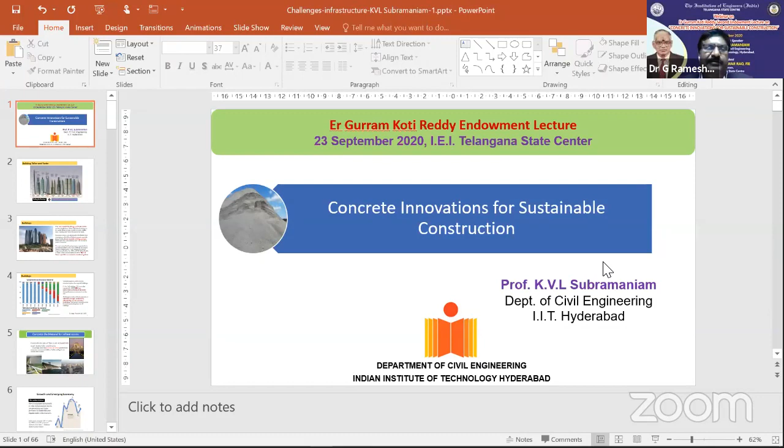Let me start by sharing my screen. Right, so let's see. Okay, so now I'm in the presentation mode, and again, thanks once again for giving me a chance to present. It's a topic that I'm very passionate about: concrete structures and the innovations taking place in concrete materials and concrete technology.

Because sustainability has become a buzzword, where we are all talking about sustainability and sustainable construction, I think it's important that we put things in perspective when looking for sustainable construction. So with this brief introduction, let me get started with where we were, where we are, and where we are going.

Burj Khalifa, to give you a point of reference, is about 850 meters tall, almost a kilometer in height. We are literally pushing the envelope here in terms of what we are able to achieve in construction. It's not just that we're going high, but we're pushing the envelope in terms of several technologies that need to concurrently be possible for us to put a man basically living happily at 850 meters, which includes, of course, the construction technology.

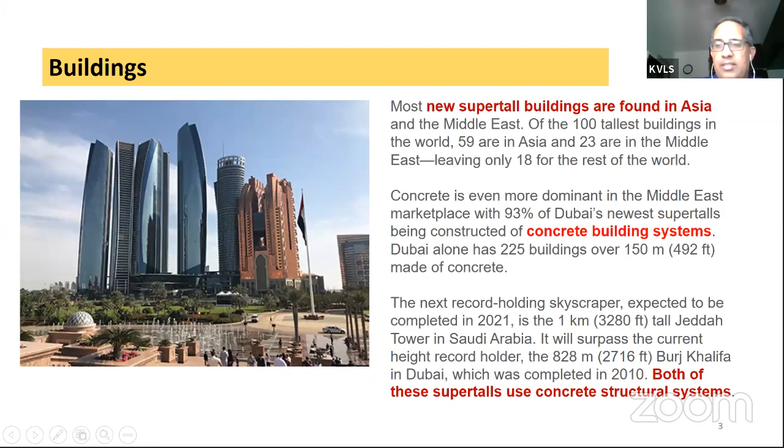If you look at numbers coming out of Dubai, which has perhaps the largest concentration of super talls, 93% of super talls in Dubai have essentially concrete building systems. Two of the tallest buildings in the world - Burj Khalifa, which is 850 meters tall, and the Jeddah Tower, which is under construction and will be 1 kilometer in height when complete - both of these super tall structures use concrete structural systems.

Let me show you a distribution of how concrete has emerged as the material of choice for construction. In this bar graph, if you look at the extreme left, the 1930s was when super tall construction started - the Empire State Building was built in the 1930s. In that decade, the color is light blue, which means steel was the material of choice for super tall constructions or tall buildings. As we walk across the decades from the 1930s to the 1940s and so on, by the time we come to our current age, 2010-2018, concrete is starting to replace steel as the material of choice, and steel has basically shrunk in proportion of usage in super tall buildings.

Concrete is now basically used in 63% of super tall buildings - buildings taller than 200 meters are basically built with concrete structural systems. Then there are other alternate forms of construction like composite construction, where we use steel and concrete together for a very efficient structural form and structural systems. Between composite and pure concrete systems, they basically make up the bulk of constructed super tall buildings.

Now, the reason this has become possible is because of the advancements we've managed to achieve - advancements in concrete strength, where we are now able to produce very strong concretes. We've made tremendous advancements in pumpability of concrete - now we're able to pump concrete to great heights, to 800, 850 meters. Of course there's also affordability in terms of cost and overall economy, as concrete is the cheapest construction material. And there are several construction techniques, which I'll emphasize later in my talk, that are now available, which are not only speeding up construction but actually giving way to what we call form-free construction, where one can literally go from the drawing board to having a constructed structure.

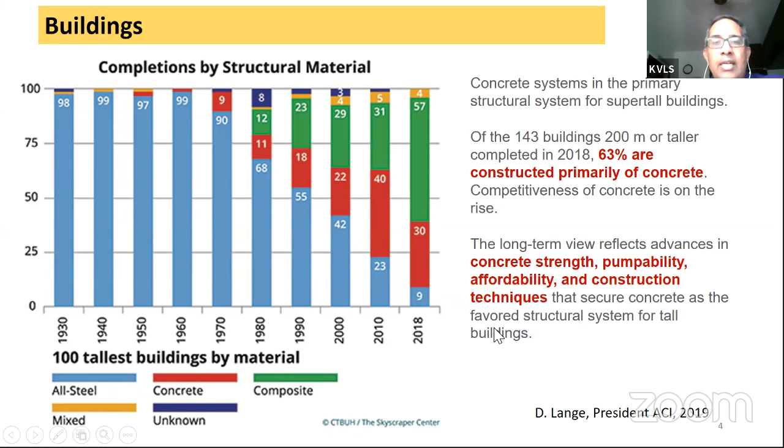Going forward, just to give you a brief overview of what concrete is and where it is used. Today, concrete is the most extensively used construction material in the world. It is the second most widely used material on this planet, second only to water in terms of consumption. If you look at total material usage, we consume about 2 tons of concrete for every human being on this planet per year. Its usage on this planet is second only to water.

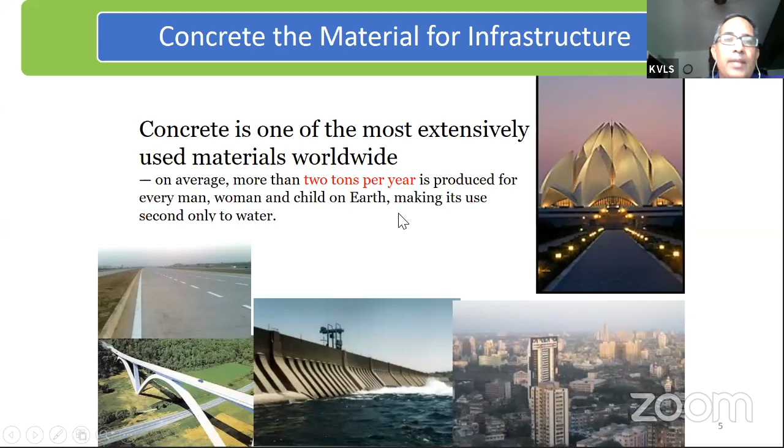Now, if you look at India in particular, we're talking about a $5 trillion economy. That is our dream. This is an old report from McKinsey, from around 2007-2008. Around that time, they projected that if India is an aspiring financial superpower, it would have to invest in infrastructure, close to $1.2 trillion. Without infrastructure, there is no economic growth. We cannot dream of 7 to 8% sustained economic growth without providing the infrastructure needed to sustain that growth. Recently, Niti Aayog has looked at this more seriously, giving infrastructure a big push, realizing we cannot achieve the projected growth and become a $5 trillion economy unless we invest money in infrastructure.

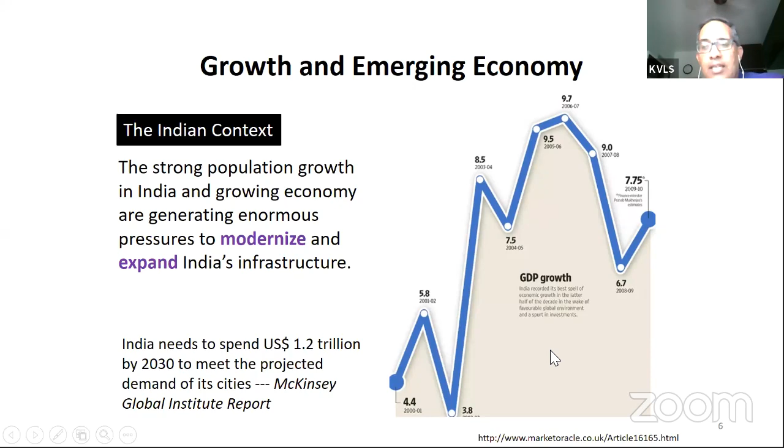And when it comes to infrastructure, concrete is the material of choice, which means we have to look at concrete very closely. We have to be able to produce this concrete in the volume needed to put all that infrastructure in place, so we can sustain the economic growth we're talking about, so we can catapult ourselves from a $1 or $2 trillion economy to a $5 trillion economy. So that's the backdrop of the material concrete and the role it is going to play in our economy.

Now, one of the issues with the requirement of concrete for infrastructure is that concrete is made with cement. This graph shows cement production. If you look at the red here, that's China. If you look at China today, in 2020, China is the largest producer of cement in the world, followed by India, shown in blue. So we are the second largest producer of cement in the world. In fact, India produces more cement than the US and Europe combined. So we are even today one of the largest consumers of cement, second only to China.

Now, where did all this cement in China go? Starting from 1990 up to 2020, for almost 3 decades, China was the leading producer of cement, and none of it was being exported. It was being consumed internally, domestically. All of this cement went into making concrete, which went into making their infrastructure. Today, if China is a $12 trillion economy, it is because of the infrastructure they have put in place over the last 3 decades.

Now, if you look at this graph, India's projected demand up to 2050 is going to take us into territory where by 2050, we will be the largest producer of cement. We need this kind of cement production for the infrastructure we're talking about - the high-speed train project, port facilities, dams, the road network, transportation network, and even housing for the large population migrating into urban centers. So we need a lot of concrete, and for that, we need a lot of cement.

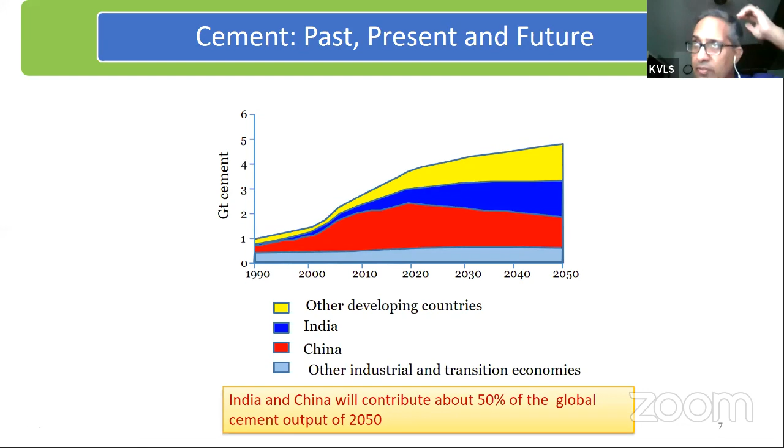One of the biggest problems with this requirement of cement is actually threefold. It's not just one problem. And we need to overcome these problems in order to sustain the production of cement so that we can hit our economic target of tripling our economy in the next 20 years.

Now, what are the challenges with cement production?

One of the biggest challenges with cement production is our projected need of cement in 2050, which is going to be 750 million tons per annum. That is the volume of cement we'll have to produce. It's a projected number, but it's based on a realistic estimate of what we need to put in place in the form of infrastructure.

So to meet the 750 million tons per annum demand, we need to produce the raw materials needed, and one of the primary ingredients for cement production is limestone. Our current available estimates of limestone are only going to last us 35 to 40 years, which means we may run out of limestone before we're ever able to produce all the cement we need for putting our infrastructure in place.

The second problem is the energy requirement. Cement is an energy intensive material. We need a lot of energy to produce cement, so we need to constantly look for sources of energy to sustain cement production.

And the final thing is the carbon footprint that goes with cement production. Cement has a very large carbon footprint. One ton of cement produces almost 850 kilograms of carbon dioxide. Depending on the source, cement production is the second or third largest anthropogenic source of carbon dioxide in the atmosphere.

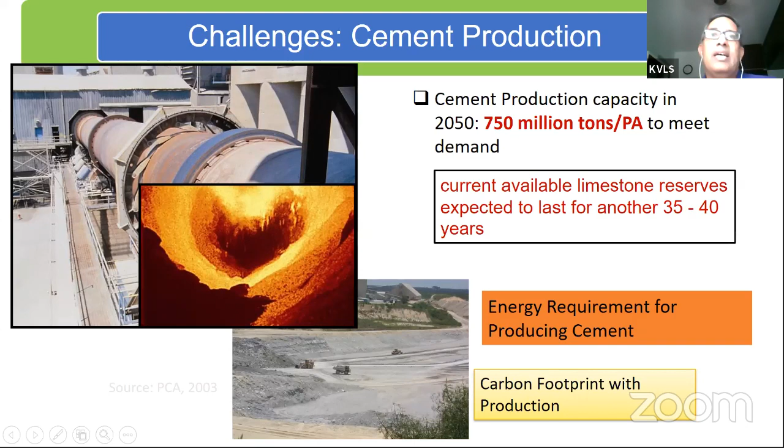So with all the environmental constraints, cement production does become a challenge in the future. How do we keep producing cement while pumping out so much carbon dioxide into the atmosphere? And how do we produce cement with these limitations of limited limestone resources and energy demand? This is a problem that we as people researching concrete are very well aware of, and we've started working on it in several forms.

Normal cement is made with clinker and ground with gypsum. That is typically what cement is made up of: 95% clinker and 5% gypsum.

Now we are already starting to look at replacement strategies for cement. The idea is to produce cement which uses less clinker. It's the production of clinker that uses limestone, that's associated with the carbon footprint, and that's associated with the energy requirement. So one of the things to do would be to look at replacement of clinker in the cement.

We are now looking at replacing clinker with waste materials like fly ash and slag, both of which are post-industrial waste materials. We're able to produce cement while reducing the clinker factor. Through research, we've managed to reduce clinker factors in cement sometimes down to almost 30% to 40% of the original clinker requirement of normal, ordinary Portland cement.

So that is already happening. Now what that allows us to do is stretch our resources significantly, reducing the environmental impact and the energy requirement in cement. So that is one way we're trying to become more sustainable, stretching the material to give us the required performance.

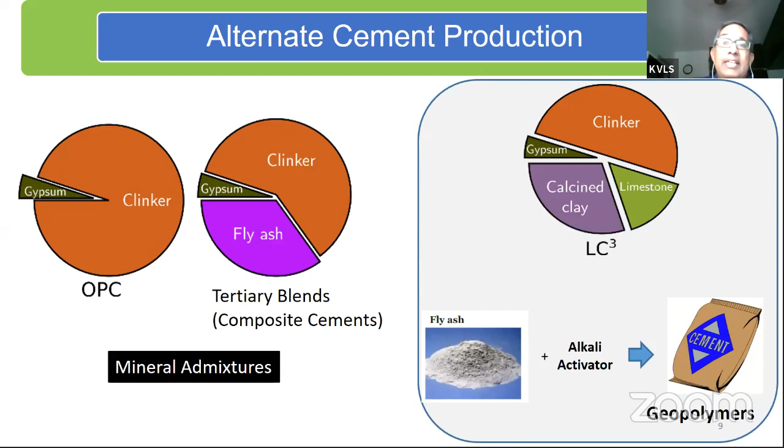These are materials that are produced as a byproduct of some other process. We are able to use those materials and start producing cements. These cements rely on a process called geopolymerization, hence the term geopolymers, and these cements are also coming online. Now, the biggest advantage of using these cements is that we utilize waste produced by another industry. So basically, there is no carbon footprint associated with this material, and we are producing material that is required. So it kills two birds in one shot. That work is also going on in parallel, where these alternate cements are being explored and developed for commercial use. Now, that is as far as the material challenges go.

Now, what about concrete? One of the biggest challenges we have in concrete is when we place concrete, we need to put it into formwork. So we have to arrange shuttering and pour concrete into it. If I want a beam, I put the shuttering in the form of a beam and pour concrete in there. Eventually when concrete hardens, it takes the shape of the beam. Now, one of the biggest disadvantages with this is that I'm limited to rectilinear shapes.

I'm basically limited to shapes which are rectangular in cross section, because on site it's very difficult for me to form complicated shapes. So that is one of the biggest disadvantages of concrete. The disadvantage lies in the fact that rectangular shapes are not most efficient. They have a high material usage. If I want an efficient structural shape, I'm better off using an I or a T shape. But forming I or T shapes in the field is very difficult, and that's why we end up using these rectilinear shapes, leading to inefficient use of material, resulting in heavier structures and overall inefficiency in terms of material usage. So that is one of the biggest challenges in construction: how do we make this process more efficient, coming down to using the material more efficiently?

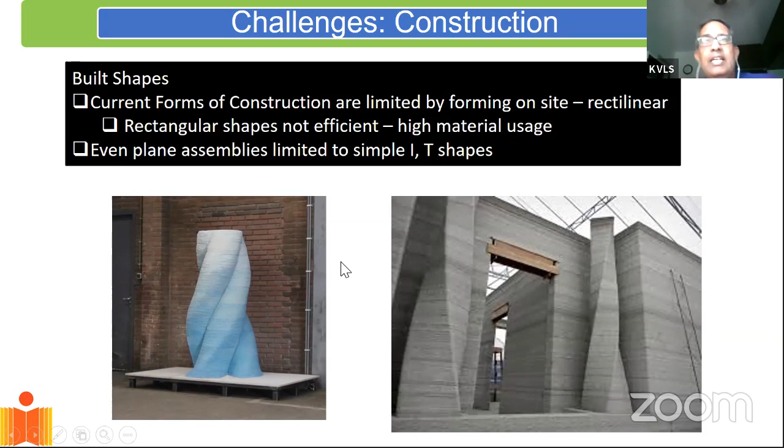And the question is, what if the most efficient shape is what is shown here on the left hand side? What if the most efficient shape of the column happens to look like a twisted shape as I've shown here? Now, doing this on site is practically impossible with our current construction technology, which means that we actually have to develop construction technology, construction methodologies which will allow us to produce these shapes on site, taking us into a completely new domain. These are the new developments that we are working on in terms of concrete construction technology.

Some of the other challenges with concrete is that we basically use formwork for construction. We have to assemble the formwork, put our steel and tie the steel work, and that is a very time consuming process requiring a lot of labor. So one of the other challenges we are facing in concrete construction is, can we speed up this process? Do we really need formwork? Do we really need shuttering? Do I need this reinforcement in the form of mesh, which has to be brought in place and tied in place? Can I speed up this whole process?

And so that is where we are looking now at form-free construction, where I don't need formwork. I can simply come and take an AutoCAD drawing and print a structure that I want to use. So that is the ultimate form of technology that we are all pursuing.

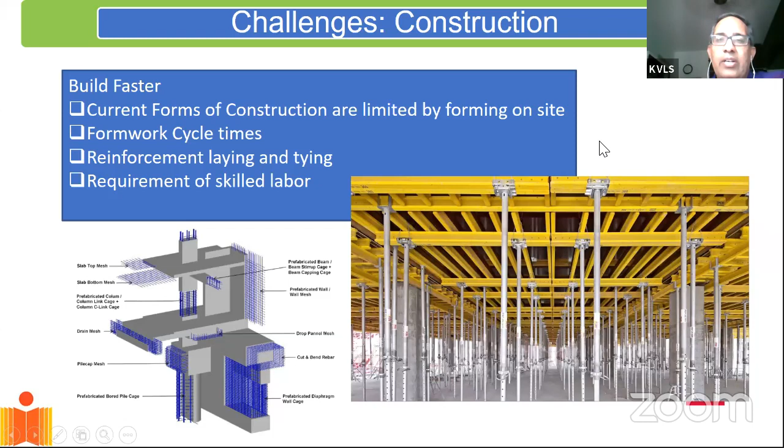So now, if I look at concrete construction of the future, what we are looking at is making concrete responsive to the requirement. Previously, when I was a student, we were taught concrete as a 1-2-4 or 1-3-6 mixture. We would mix concrete in a certain proportion of ingredients, cement, water, and aggregate, and hope that we got the strength. That is it, it was just some material that gave strength. But now we are revising our outlook on concrete, saying it is no longer enough for concrete to just mix and deliver strength. We want concrete to be responsive to the requirement, where we want to tailor the delivery and placement of this material. I want to engineer the material so I can deliver it in the way, shape, and form that I want, and once it is in use, it should ensure the performance. It should basically give me a long-lasting structure up to infinity.

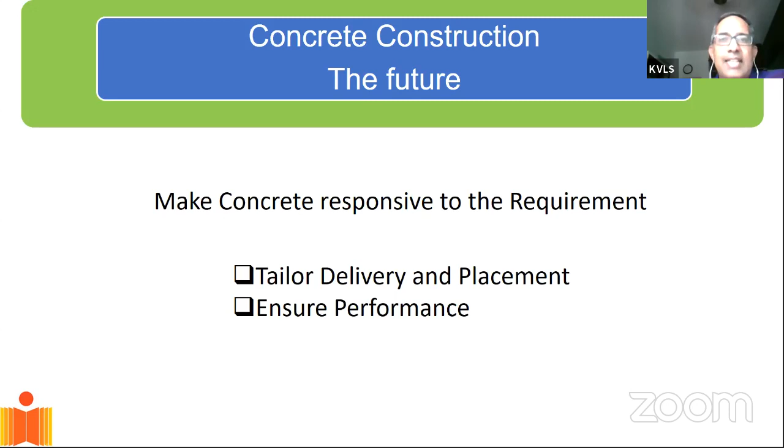Essentially, that is what we are looking at in terms of our concrete construction of the future.

Now we have moved into what is known as performance-based design in concrete. Conventionally, we used prescriptive requirements of strength, saying we need M35 grade, M40 grade, or M60 grade of concrete. These are all prescriptive measures of strength, and that's how we designed our structural members, designing for strength using concrete of a certain grade.

But that is now shifting. Strength is only one of the performance criteria. Design criteria are now expressed in terms of achieving performance objectives. It's not enough for concrete to just meet strength requirements, or for the structure to withstand extreme events. It should deliver on performance objectives.

Now we're talking about performance objectives not just in hardened concrete or when concrete is used in a structure, but performance during formation and placement. This has become very important. I want concrete to behave in a certain way while building the structure, and it should give a long service life. So performance during service life and during construction have both become important performance measures of concrete.

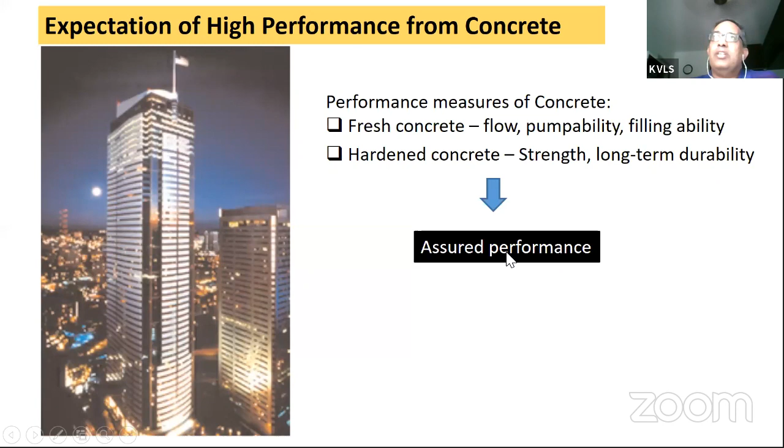Then in hardened concrete, once it has hardened, it should deliver on strength, which we already do today, but it should also ensure long-term durability and give long-term performance. If I'm able to hit all these performance measures, I get assured performance, not just in the short term but also in the long term.

So performance specification is now shifting to also consider the material perspective. Performance specifications were already used in structural performance, designing structures for seismic, wind, and other extreme events. But now we bring that into the materials perspective too, talking about formability of the material - how formable is it, can I form it into any shape I want?

Placement and speed - how fast can I place the concrete, and how fast can I deliver the structure? And of course, long-term durability - once the structure is in use, how durable is it in the long term?

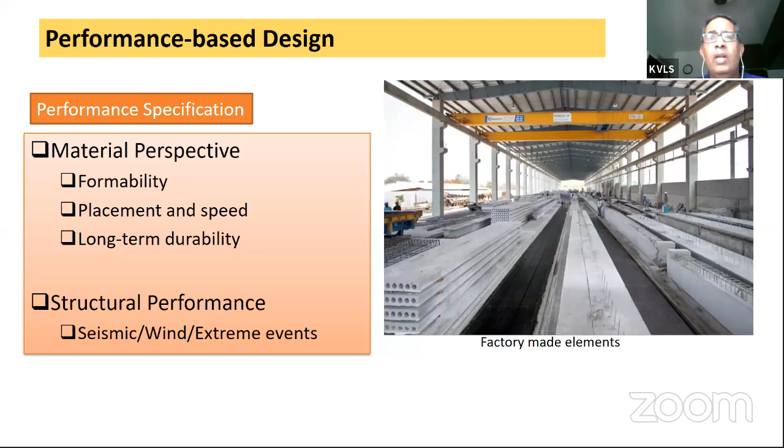So just to show you some performance requirements put in place in some marquee or noted buildings: in Burj Khalifa, the pumping of concrete was achieved for a height of about 601 meters - concrete was pumped for almost half a kilometer.

That is an achievement in materials, because concrete is made up of cement, water, and aggregate. If I try to pressurize the material to create a head of 601 meters, the material will start to segregate - water, aggregate, and cement will separate because under that high pressure these three materials have different specific gravities and tend to segregate. So how do I keep this mixture homogeneous so it flows without segregation when raising the head to about 600 meters?

That is the challenge, and it requires material design. How do I design the material so that I'm able to achieve this?

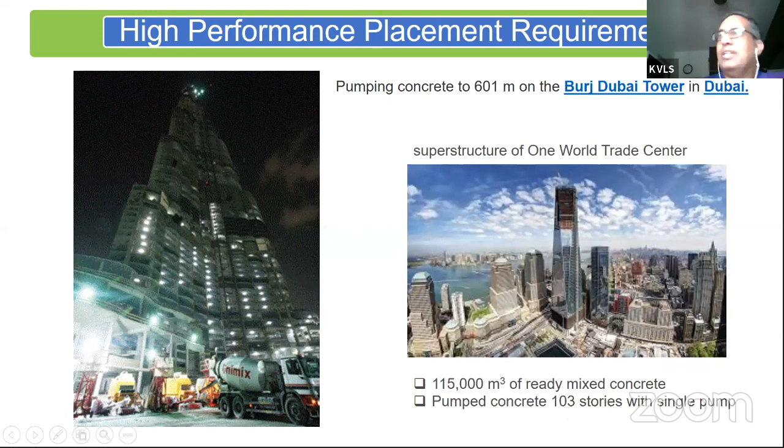Now, in the superstructure of One World Trade Center in New York, this is the structure that replaced the World Trade Center, concrete was pumped for 103 stories in a single pump - lifted about a height of 103 stories in one single pump. That requires performance requirements from fresh concrete.

Now, just to show you the specifications put out for One World Trade Center: concrete had to be made with less than 236 kgs of cement per cubic meter of concrete.

Now, this is a very low number. Most of us who do concrete mix designs know that at the very least we use 300 kgs of cement per cubic meter, otherwise 350. 236 kgs of cement per cubic meter is a very low number, but this was specified.

It was specified to the contractor that he or she could not use more than 236 kgs of cement per cubic meter. Not just that, concrete up to 40 floors had to achieve a compressive strength of 80 to 95 megapascal, and the upper floors had to achieve 60 to 70 megapascal. So the contractor had to deliver a concrete mix design achieving 80 to 95 megapascal using a very low weight of cement per cubic meter.

That, of course, requires very careful thought of mix design, where supplementary cementitious materials have to be used - slag and fly ash. Optimization has to be done. Careful mix design has to be done in terms of packing of aggregate and cement to achieve these specifications.

In addition, there were performance requirements put in place. The performance requirement was that there was some slump flow requirement, but also the ability to pump. It was required that concrete should be pumpable for 15 floors for the 95 megapascal mix, and the 80 megapascal mix should be pumpable for 40 floors.

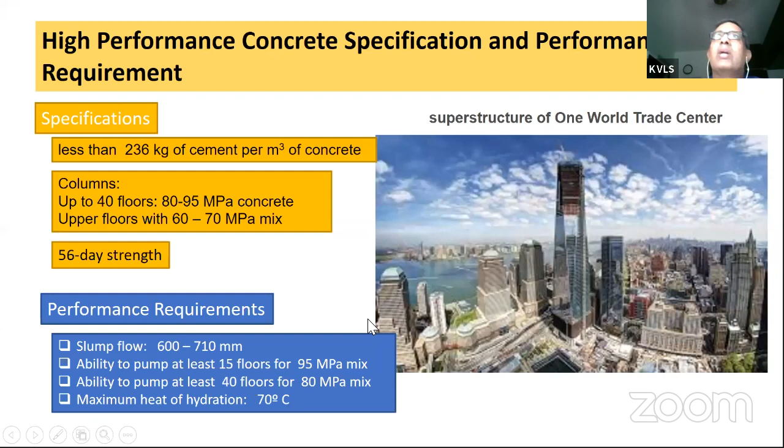The only way one can meet these performance requirements is basically by bringing in additional materials. If you look at concrete, the basic combinatorics of cement, water, and aggregate cannot achieve what I just talked about. I cannot deliver on the performance just by thinking of concrete as cement, water, and aggregate. The age-old philosophy of 1:3:6 or 1:2:4 concrete will not deliver what I talked about.

What we need is basically, this is what is now expected from concrete. I want concrete to flow like water. I want it to set on demand. I want it to gain strength rapidly - that is, rapid strength gaining so that I can turn around structures much faster. I can have 3-day slab cycles instead of 7 or 14-day slab cycles.

The concrete should be durable to infinity. That is, once I cast the structure and it's put to use, I forget about it - it basically retains its original level of performance over the long term. It looks like new without maintenance. That means the material should have some kind of self-cleaning, self-cleansing ability. It should not attract fungus. It should not attract dust. It should have some of these abilities to clean and rejuvenate itself.

And of course, all of this has to be achieved at a low cost, so I cannot start driving up the cost because then nobody is interested in the material. These are the requirements that are now becoming quite common expectations from concrete in terms of its usage in structural applications. How do we do this now?

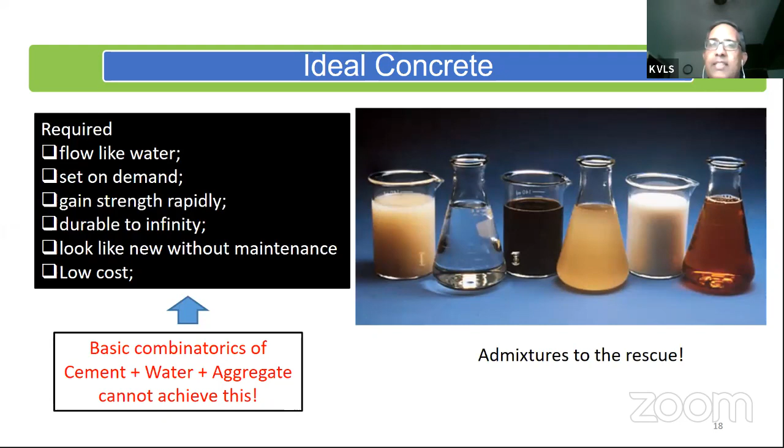Since the basic combinatorics does not work, we have to start using admixtures. These admixtures have started coming up into the market now. These are chemicals which are highly specialized - engineered chemicals designed to improve specific properties of concrete. Small quantities of these admixtures can produce significant improvement in the performance of concrete. So what is this admixture? Basically, an admixture can be either a chemical or a mineral admixture, depending on its origin.

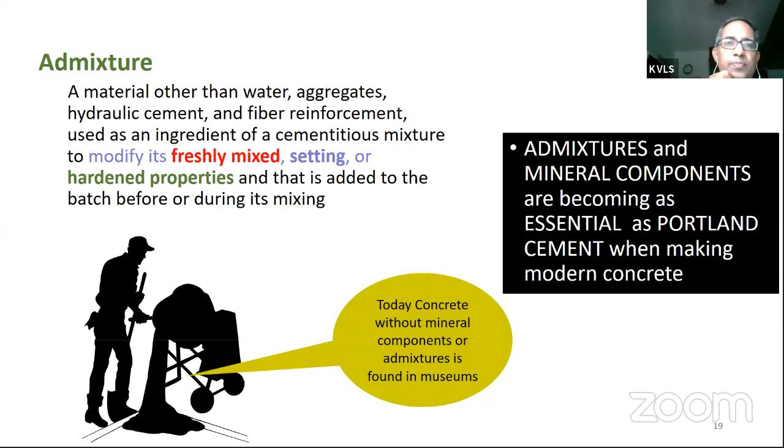It is added to concrete, and basically it modifies the fresh mixed property, setting behavior, or the hardened properties of concrete. Practically all concrete made today contains admixtures. When it comes to requirement of admixtures, because I'm targeting specific performances, we look at admixtures as enablers of performance. I'm trying to target specific improvements in performance with the use of these admixtures.

So when it comes to performance, I'm talking about performance in the fresh state - rheology control, the flow behavior of concrete. Can I engineer that to achieve what I want in terms of buildability, placement, and pumpability? Then I also want to enhance the performance of mature or hardened concrete in terms of strength and durability. In the first part, I want to look at this performance modification in terms of fresh concrete, and of course there's a whole list of admixtures available.

And the list is basically ever growing. Every other day we see a new admixture that has come into the market, and these are enhancers of fresh concrete performance - the concrete performance when it is still fluid, when we are placing it. That's what we are trying to enhance. We are basically looking at placement and production control - how do I gain control over the placement and production of concrete?

Gone are the days when we are looking at concrete as simply mixing and dumping it into the formwork. Now we are using words like placement and production - that's what has come into the jargon now.

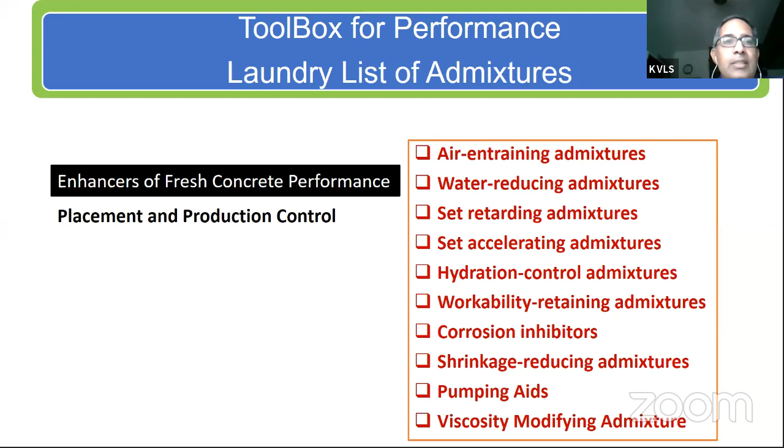So when it comes to transportation and placing of concrete, we're looking at construction performance during placement itself. And now we are expecting, like I had shown before, performance in pumping. I want concrete to be pumpable, and I can specify the height, but the material should give me a homogeneous mixture that can withstand that pressure without segregating.

I'm talking about concrete that can self-level itself - that is, it flows like water, fills the form, and I don't need to vibrate it. The final goal for all of us working in this area is formless placement. Can I actually do concrete where I simply mix it and print it into whatever shape I want without having to use a form, formwork, or shuttering?

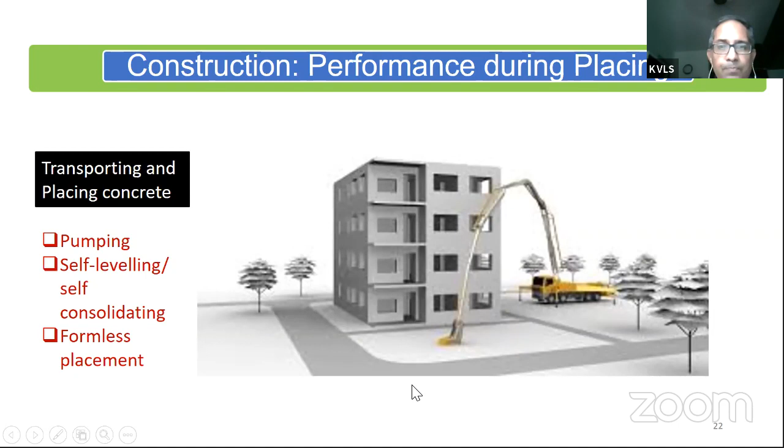So let me just quickly take a look at some of the admixtures that are used. The most common admixture that has now become quite common in usage is the water reducer. It basically reduces the demand for water. By adding a little bit of this water reducer, I'm able to increase the flow of concrete, basically getting concrete to flow instead of slump.

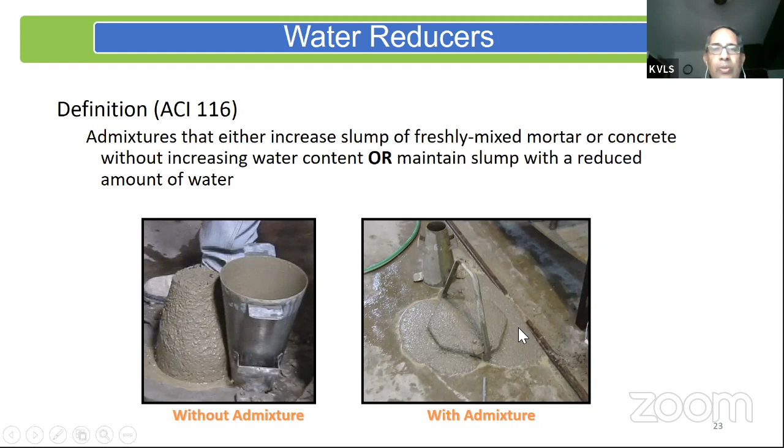So this is how concrete looks like when it slumps - it basically still retains the shape of the cone. But when it flows, it basically spreads, and that's what I'm trying to achieve.

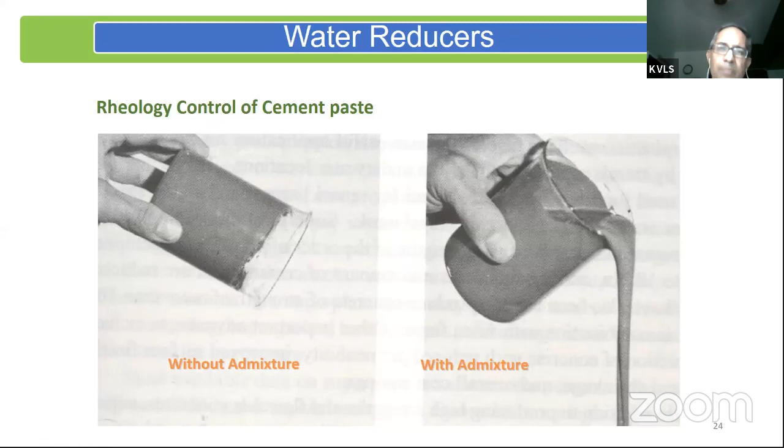If I look at cement paste without that admixture, it is a paste, but a very viscous paste, and I'll have difficulty trying to empty it out of this beaker here. But the minute I add a few drops of this water reducing admixture, I'm able to get it to flow like a very thinly viscous liquid - it starts emptying the container very easily. So this is rheology control, or the flow control, that I'm achieving by adding just a few drops of this water reducer. It's a chemical, and this is basically the role of the water reducer that is shown here.

Now, these polymers and water reducers are chemical admixtures, and they're very highly engineered chemicals - in fact, very, very complex chemistry of these molecules. They're basically made up of these comb polymers with teeth, and the specific composition of the teeth and the comb, the spine, these are all engineered so that I can achieve dispersion of cement paste very easily by steric hindrances created by these molecules. These are very, very complex molecules that are specifically engineered.

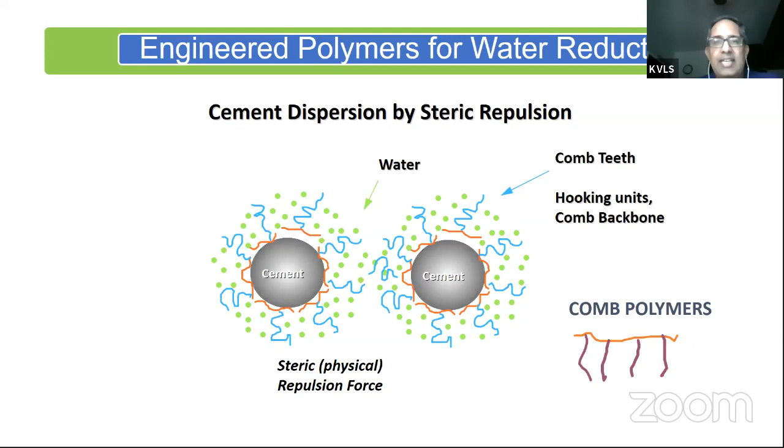And a lot of work is now going on these engineered chemicals to achieve the performance enhancement that we're looking at. So how does that beneficiate concrete?

So how can we overcome this problem? High slump will not help, because simply increasing the slump does not address the problem of flow. We need concrete that can flow very easily.

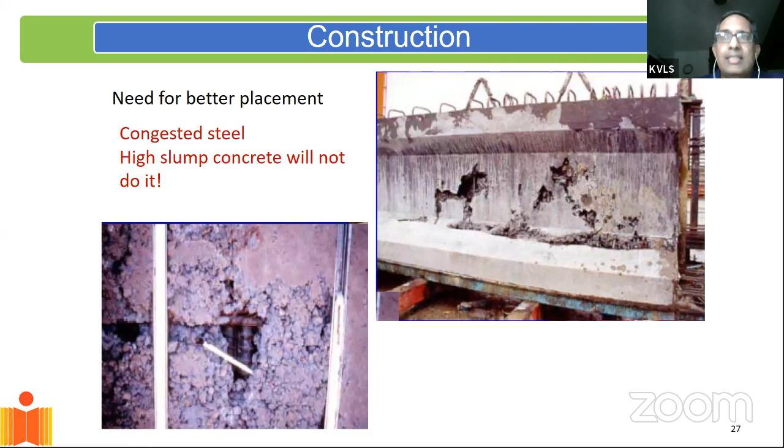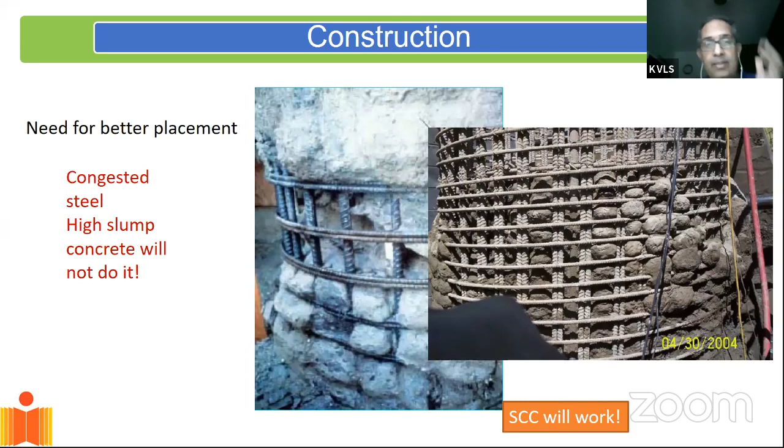So what do we need then? We need concrete that can perform. We need concrete that can flow through these small gaps between the reinforcement and fill the entire space that's available to it. So that basically is a performance requirement from concrete now, that I need self-filling, self-flowing, self-leveling performance attributes of concrete. But how do I get that?

If I look at concrete, it is made up of cement paste and aggregate. Now, how do I get concrete to flow? One of the easiest ways is to increase water content. The minute I increase water content, my cement paste becomes less viscous and my aggregate starts segregating. So what happens is, the minute I start adding water to concrete, my aggregates all start settling to the bottom. That's because the viscosity of the cement paste has decreased.

So now how do I increase the flow while I retain my aggregate in suspension? This requires understanding the rheology of this complex suspension. I'm working on some of these topics with colleagues in chemical engineering, and even they are perplexed by the complex nature of this particular problem—how do you hold this material in suspension, how do I hold the aggregate in suspension while I get concrete to flow?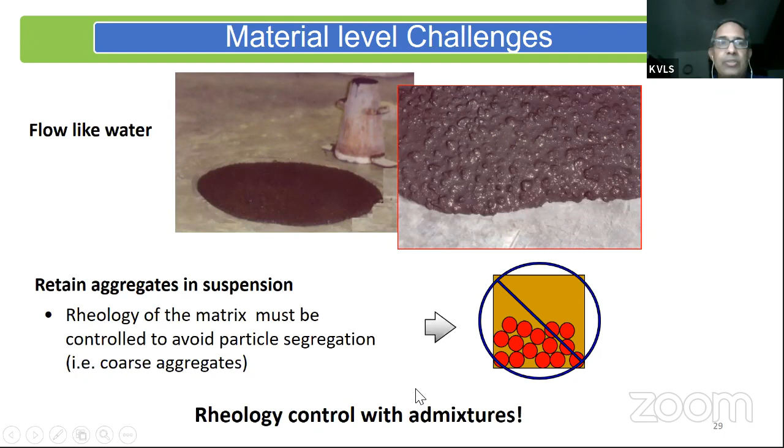And the solution lies basically in the use of admixtures. We use admixtures which lower a rheological property called the yield stress. We reduce the yield stress so that the material can flow, while we increase the viscosity of this particular concrete mixture, so that we do not get the aggregate segregating out or separating out, so that I'm able to get this homogeneous flow from concrete.

And of course, this rheology control comes with the use of several admixtures. I have to use water reducers, viscosity modifying admixtures. We use a lot of microfines in the concrete. We also use some retarders. So now, to deliver on these performance requirements of concrete, I basically start selecting different admixtures in order to deliver the performance.

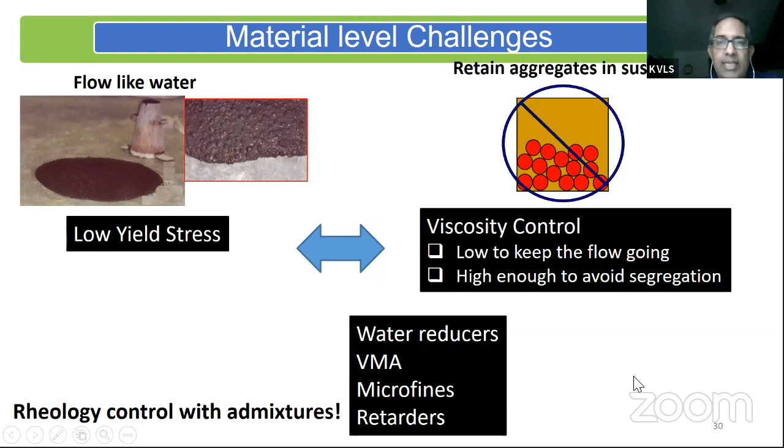And I also start looking at engineering the material. I basically have to look at my concrete, start looking at how do I blend the cement and the aggregate together? What kind of material packing do I produce so that I can achieve these performance characteristics from concrete, so that it flows like water. It has a self-filling ability.

Now, concrete made with this self-consolidating concrete—this is concrete which basically self-levels. It fills itself. It basically flows under gravity. I do not need to apply any vibration to get it to flow.

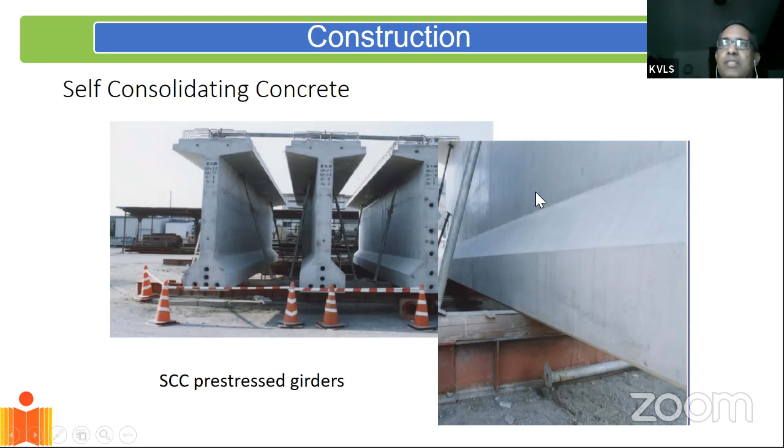The same precast girder, which was done with regular concrete, high slump concrete, is now done here with SCC. And you can see that concrete was able to fill all the small gaps between the reinforcement, the gap between the reinforcement and the formwork, and give us nice, shiny, smooth surfaces without any bug holes or any voids in the structure. Now, SCC, as it's called, self-consolidating concrete, basically flows like water, as it's shown here.

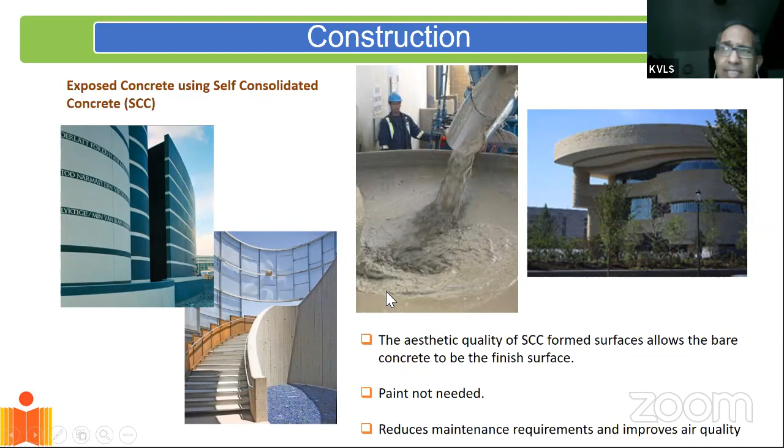And it's being used now to produce concrete which is used in a form finish manner. That is, I place concrete, and whatever finish I get after I remove the shuttering or formwork, it is put to use in the same way. So I can save on plastering. I will just give you an example of form finish concrete which we have implemented on our campus, so you also get an idea of SCC. This video that I'm about to play shows the SCC that was implemented on our campus. So this is the SCC mixture.

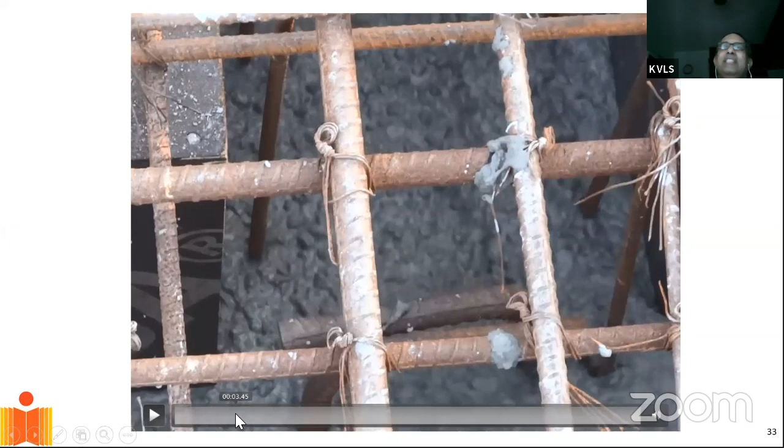So as you can see, this is concrete that is flowing by itself. It did not need any vibration. It is self-leveling, basically just like water. It levels itself, it flows, it fills all the gaps. You can see that the concrete has gone between the gaps, between the reinforcement, without any effort. And this gives you nice finished surfaces.

On the IIT Hyderabad campus, in fact, we have produced buildings with nearly 6 lakh square feet of building space made with this self-consolidating concrete. And it's all form-finished concrete where we have not used any plastering. This is a technology that I'm happy we are part of developing and implementing on a large scale.

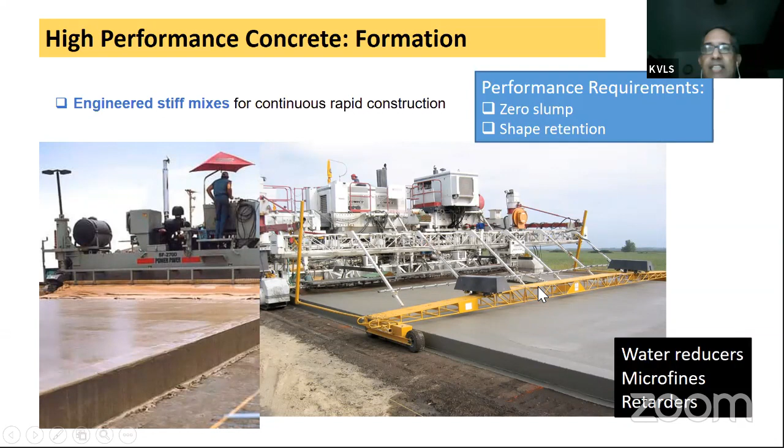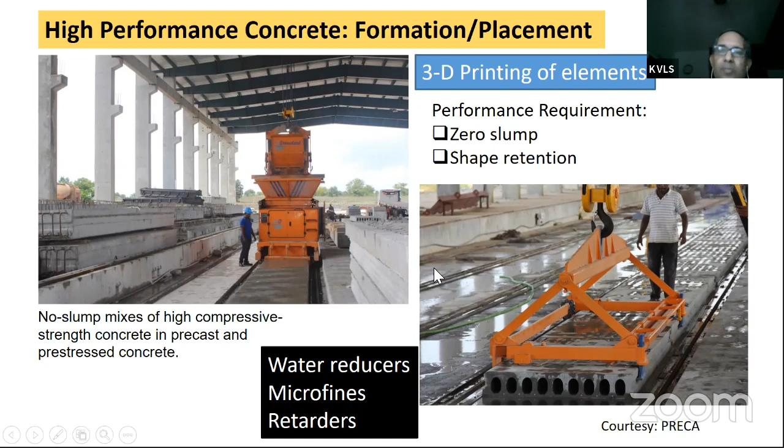Now, coming to fresh performance, the next step in the evolution of construction is 3D printing. What is required here? I have to engineer the fresh performance so that I can mimic the behavior of toothpaste. Toothpaste gives a very good analogy for me to explain the requirement of 3D printing in concrete. What does toothpaste have to do with 3D printing? When I squeeze the toothpaste tube, toothpaste flows out of the nozzle, and the minute I let go of the pressure, whatever is extruded from the tube keeps its shape. So I'm able to extrude whatever is the shape of that nozzle from which the toothpaste is extruded.

So this is exactly what we are looking for in 3D printing. I want concrete that, when I pressurize it, should flow and come out of the nozzle, and should keep the shape of the nozzle. That is essentially what I have to achieve with concrete. Now, in toothpaste, people don't realize that to get the fresh behavior the way we want it - that it flows under pressure and keeps the shape of the nozzle - the rheology of the material is engineered. Some world-class rheologists and process engineers work on it to deliver that performance, to get material that basically delivers that performance.

We have to bring similar science into concrete, and that is what is being done in terms of engineering the fresh performance of concrete, so that we can mimic this behavior of toothpaste into concrete. So basically we are entering into the domain of form-free construction, where I can start extruding structures and delivering them by building layer upon layer. But that requires good rheology control in terms of pumpability, achieving non-segregated flow, shape retention, and buildability.

These are all aspects that we are now starting to talk about when we talk about 3D printing. This requires good understanding of science, of rheology, material packing, and use of admixtures to deliver this kind of performance behavior. So rheology control admixtures that we use in 3D printing applications include control of thixotropy, achieving low viscosity, and high yield stress. These are all rheological properties that have to be achieved, and we use a mixture of admixture cocktail, basically. Several admixtures are used to tailor specific improvements in thixotropy, viscosity, or yield stress.

And basically what we are able to do now, thinking of printing concrete structures, is one layer upon another layer. And basically we can assemble an entire structure made of concrete with this kind of technology.

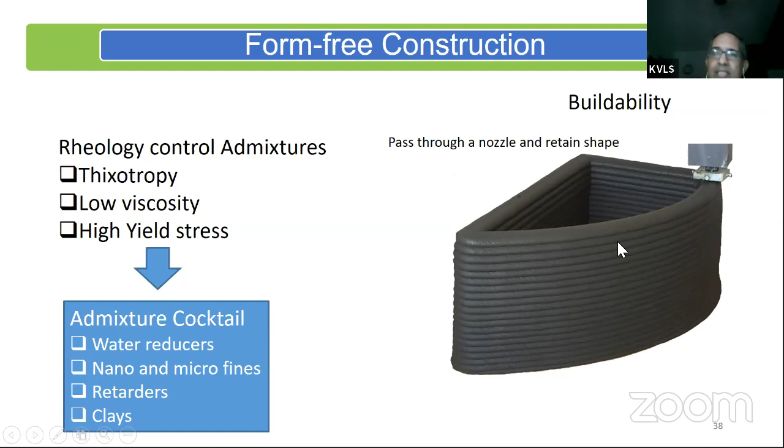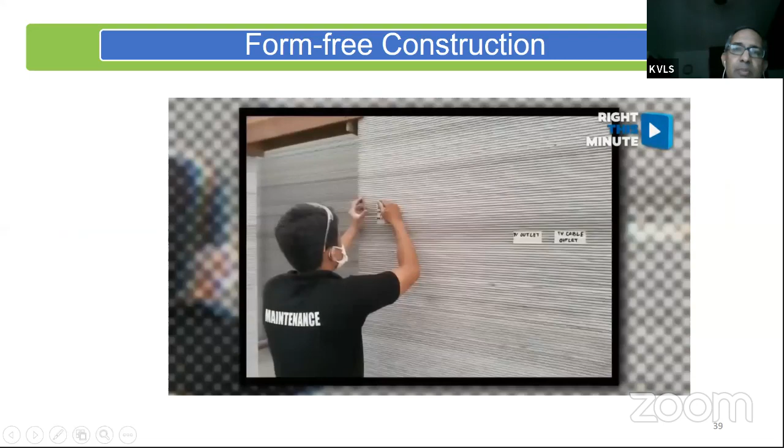Just to show you how 3D printing structures are being visualized, here is a video of a structure that was printed in Singapore. This was a structure printed as a demonstration when our Prime Minister visited Singapore, and an entire structure was basically assembled layer upon layer. As you can see, the entire structure is being assembled layer upon layer.

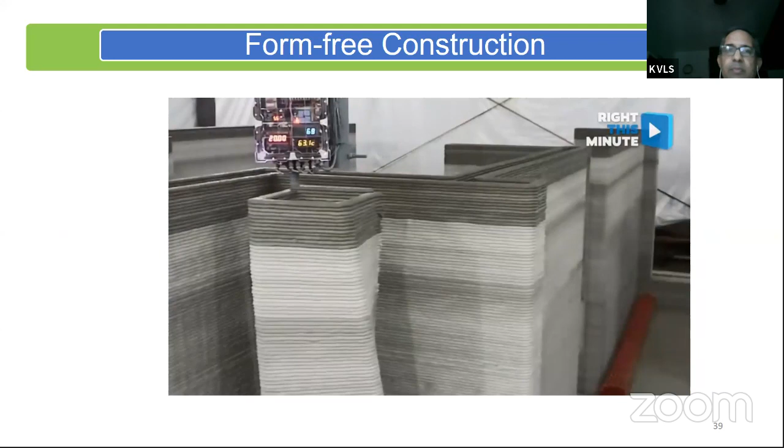Now this, of course, requires a tremendous amount of engineering to achieve material that can deliver that fresh performance, to allow me to build one layer upon another and assemble the entire structure.

But there are of course challenges in 3D printing, because we cannot have a pure concrete structure. I need reinforcement. So the next challenge, which groups around the world are already starting to work on, is how do I co-print steel and concrete together? Can I print a steel mesh along with concrete? That way we can do live construction of structures, where I feed the design to a robot and a robotic arm comes and basically prints out a concrete structure for me. That is the most efficient form of construction, where I can speed up construction, use material most efficiently, and deliver structures at a very fast pace.

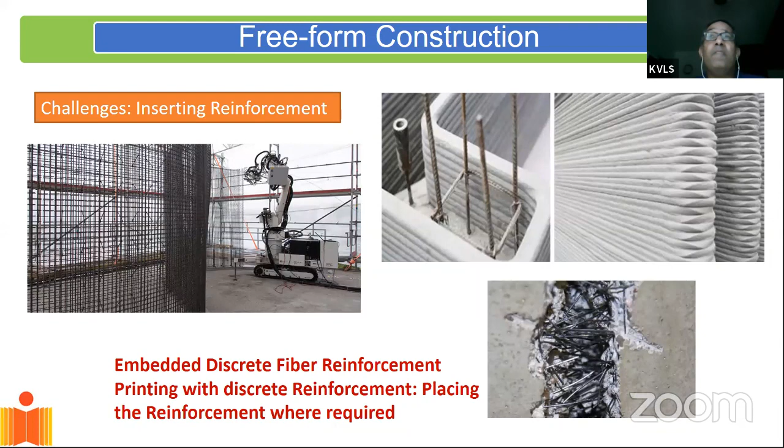Now, of course, there are other ways that people are looking at, such as embedding reinforcement into concrete. So why have external reinforcement in the form of bars? Can we use discrete reinforcement in the form of fibers instead? These are things we are starting to look at to achieve form-free construction, basically taking a drawing and printing a structure from it.

So that was as far as the fresh performance of concrete goes. Now the next thing I want to look at is performance in service. Now that I have built my structure, I have to make sure it delivers performance in the long run — that it is a durable structure. Here we are looking at enhancing durability so that I can get a long-lasting structure.

I'm motivating that by showing you this photograph of an aqueduct. This is an aqueduct in Nîmes, France, built by the Romans 2000 years ago, and it is still in use today. So talk about performance and long-term durability — if we can construct such structures today, it would essentially ensure a very sustainable development, because I'm putting in structures which are very long lasting.

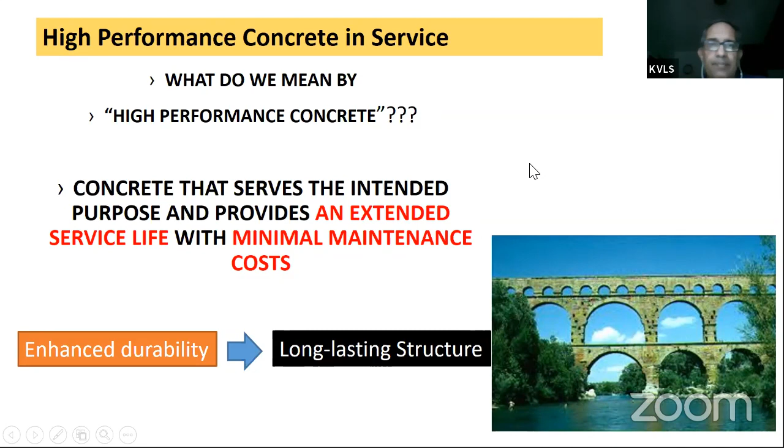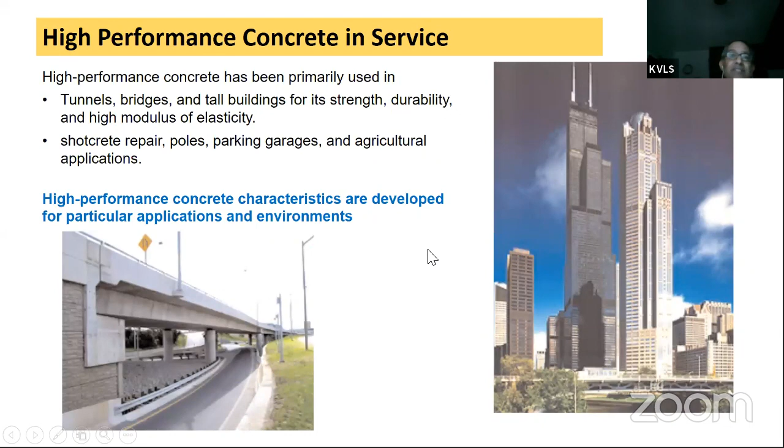So high performance concrete in service is basically becoming quite common, where we are now also putting performance requirements on concrete when it is in service. And I will just show you how we achieve this high level of performance when it's in service.

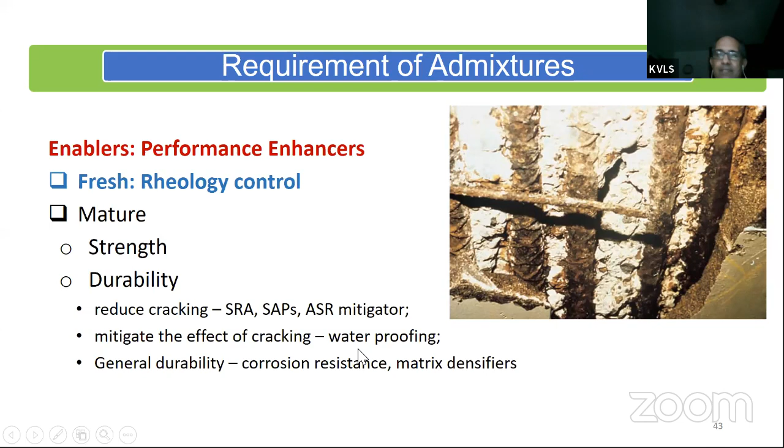So here now we have to talk about performance of mature concrete in terms of strength and durability. Again, we bring in a whole lot of admixtures that help us achieve this performance in terms of long-term durability. There are several admixtures, ranging from coloring admixtures so we can color concrete and make it look beautiful, all the way to corrosion inhibitors and shrinkage reducing admixtures. We are also using matrix densifiers, which densify the matrix and give us nice dense structures. And we're talking about add-ons like integral waterproofing and fibers, which make sure that even if concrete cracks, the cracks heal themselves.

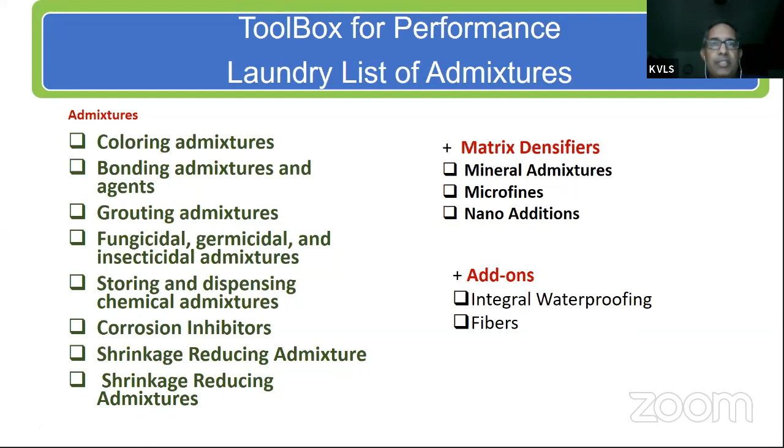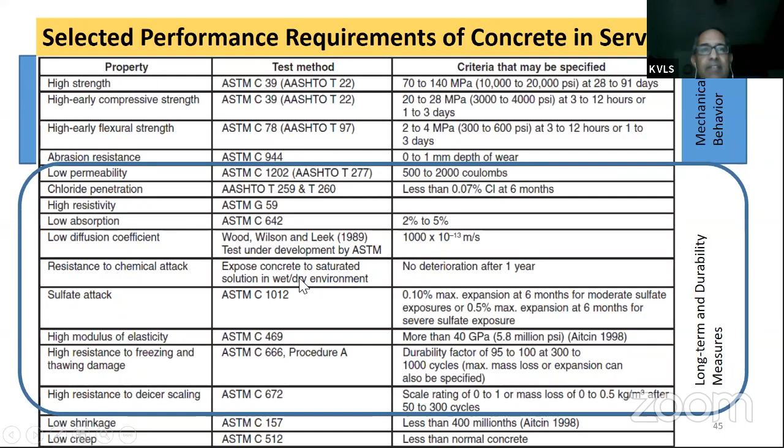These are all things we are now starting to look at as additions into concrete. And when I'm talking about performance in the long term and durability, I have to talk about the lot of tests that are available. Even the testing protocols are being enlarged. Gone are the days when we would only test concrete for strength. Now there are tests being developed for long-term performance of concrete, including permeability, chloride penetration, sulfate attack, and all of these are becoming more common. Concrete is required to pass all these other tests as well.

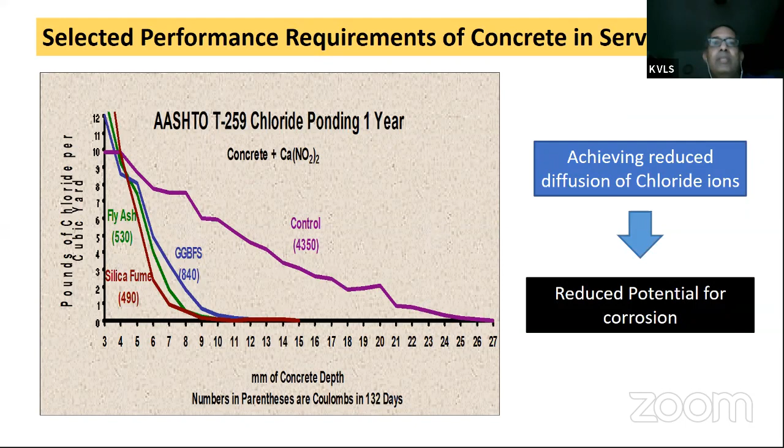Now, just to show you that I can improve the performance of concrete for one specific application, which is chloride penetration, which becomes important in marine structures. If I have control concrete here, where chloride has penetrated through it, I can reduce the penetration by adding some of these post-industrial waste materials like fly ash and GGBS. So the addition of these materials not only reduces the clinker factor, but also helps in cutting down on the penetration of chloride through concrete.

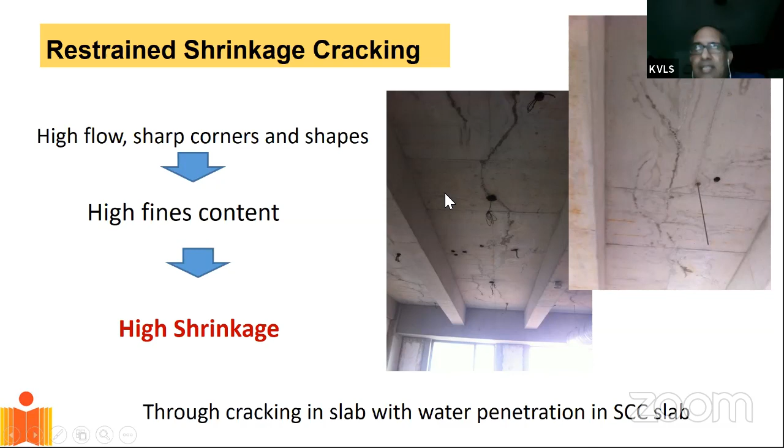Now, the other problem we have is cracking produced by shrinkage in concrete, because as I start making concretes which are self-flowing, self-leveling, these concretes contain a lot of fines. So I have to increase the fines content of concrete, and these concretes tend to shrink more. You see this concrete structure made with self-consolidating or self-compacting concrete - it basically cracked from shrinkage, high shrinkage in the concrete.

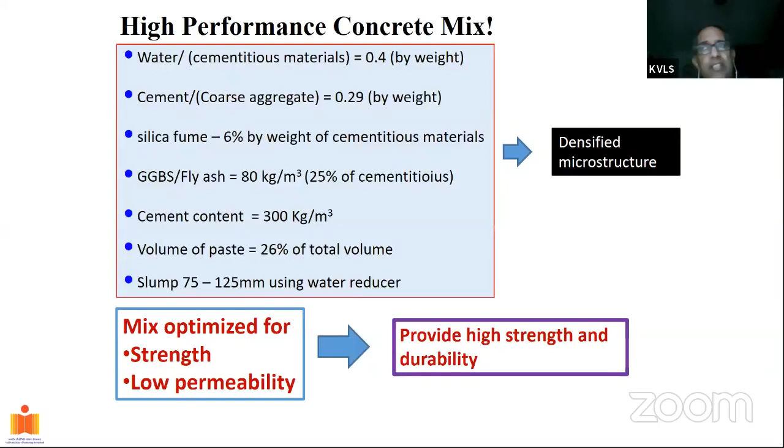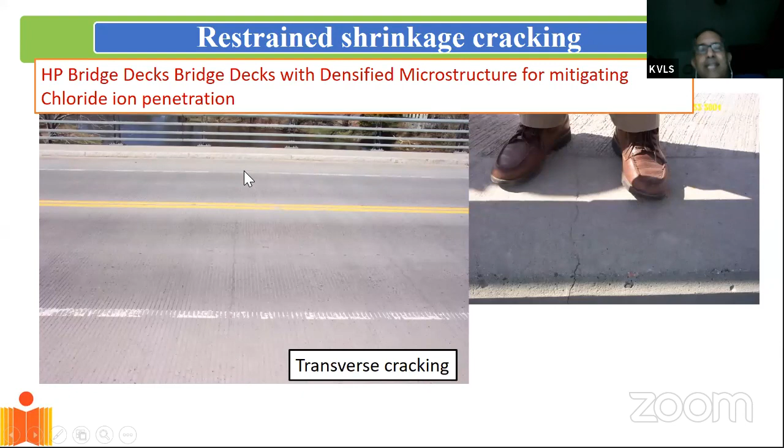Now I just want to show you this concrete that was engineered for performance. When I only looked at a specific aspect of performance in terms of penetration of chlorides into concrete and strength, the concrete nevertheless cracked, because of shrinkage. So that means this is another performance attribute that was missed out. This is a bridge deck made from concrete which is very dense, very strong, and also dense enough to prevent penetration of chloride ions through it, but it nevertheless cracked. The reason for cracking was established to be shrinkage.

Some analysis of this concrete bridge deck revealed that the concrete had high enough strength, it was uniform, and the cracks as they formed in this bridge deck were basically formed all the way around the aggregate, which means the cracks were formed at a very early age in concrete. So these cracks that result from shrinkage happen when the concrete is still within 1 week to 10 days after casting. So how can we cut down on this cracking?

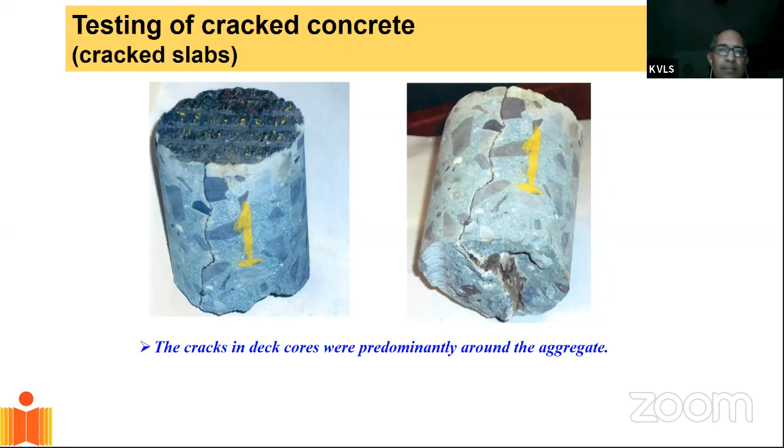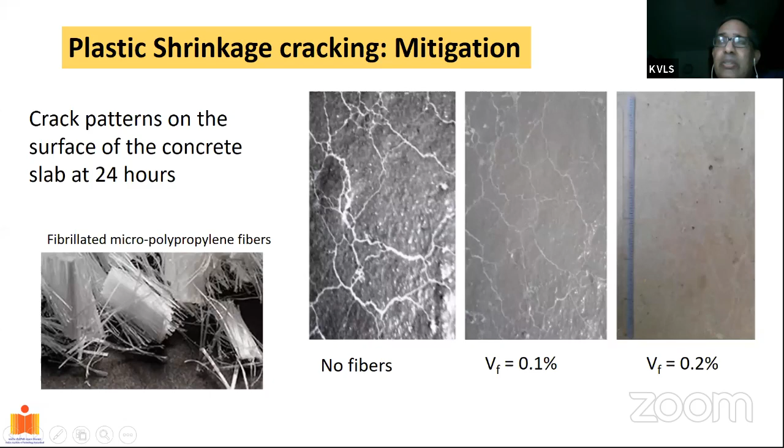Adding fibers - a small dosage of these polypropylene fibers that are commercially available now cuts down on these cracks that appear on the concrete surface. So I'm showing you that concrete without fibers has these surface cracks that develop, but if I add like 0.2% the volume of concrete in small fibrillated fibers, I'm able to essentially mitigate this effect of cracking on the surface. So these fibers are also being added into concrete to control this aspect of cracking caused by shrinkage.

Now, there are admixtures being developed to control shrinkage, and one of them is called shrinkage reducing admixture. Shrinkage is caused or produced because of surface tension effects of water inside concrete, and the best way to reduce shrinkage is to reduce the surface tension of water. So the shrinkage reducing admixture essentially reduces the surface tension of water.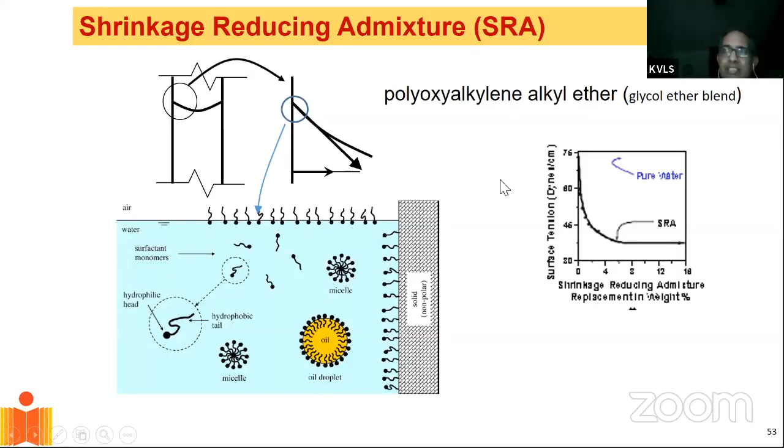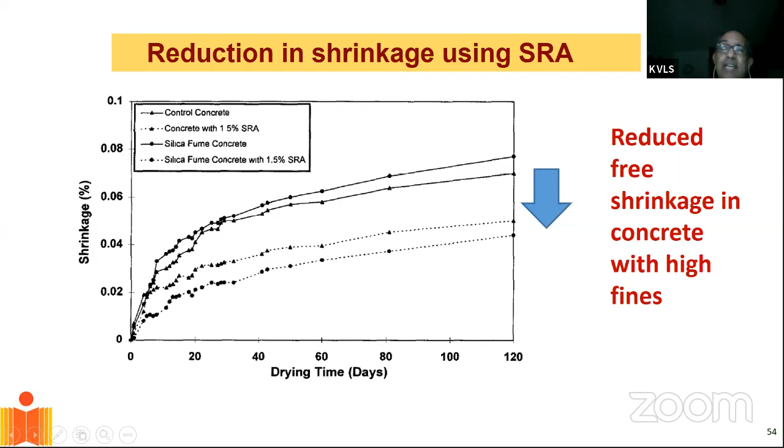I just want to show you here that if I add a small dosage, 1.5% the weight of cement in shrinkage reducing admixture, I'm able to reduce the shrinkage considerably, even with high fines present in it. So there are other kinds of technology we are borrowing to mitigate the risk of cracking.

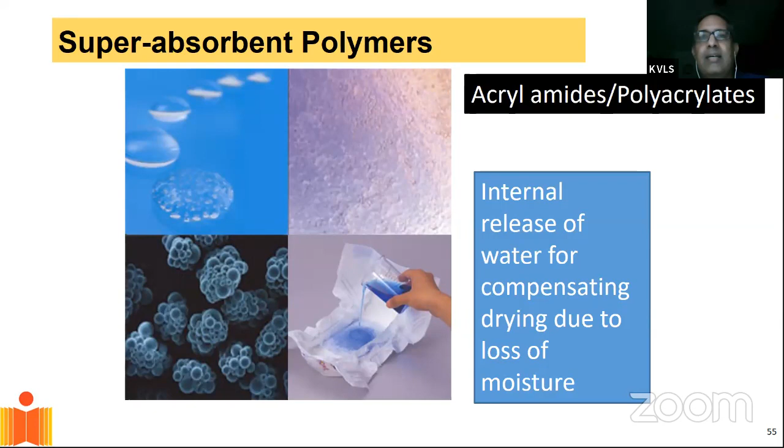This includes the use of super absorbent polymers. Super absorbent polymers are basically the polymers that go into making diapers - they absorb a lot of water and hold on to moisture. Now we are adding these super absorbent polymers into concrete so that they can release water to concrete when required. Concrete shrinks because it dries, so whenever I subject concrete to drying, if I can supply water from the inside from a superabsorbent polymer, I can keep it from shrinking. So superabsorbent polymers are being used by mixing them into concrete to reduce the risk of shrinkage.

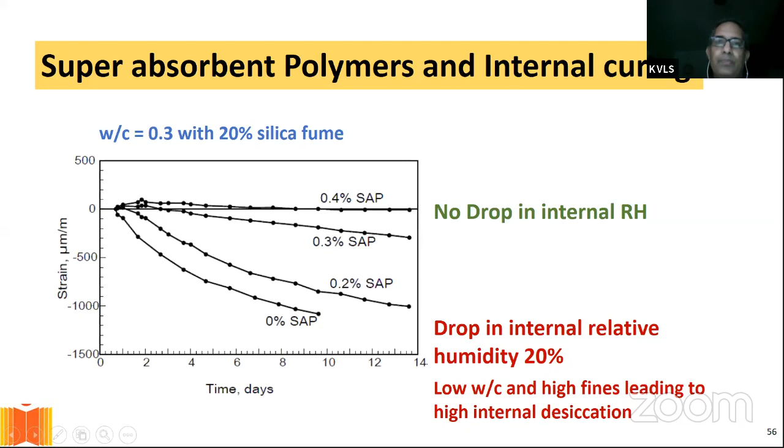Now, the other things we're also using to cut down on the shrinkage of concrete are basically water reservoirs inside concrete in the form of expanded clay and shale or pumice, which are all porous rocks that basically act like water release inside the concrete. So these are all things we are looking at in terms of mitigating cracking in concrete from different reasons.

Typically, mostly concrete cracks in service because of load effects. Those are taken care of in the design, but also from material effects like shrinkage. So I have admixtures, I have other additives that I can add now to take care of cracking in concrete.

But what if concrete does crack? Then now we are looking at autogenous self-healing and self-sealing of cracks. Self-sealing is basically when I have a crack and the crack gets filled up with some material which prevents water ingress or prevents water from getting into the cracks. And integral waterproofing essentially lies in this category where I'm able to seal the cracks.

Now we are thinking one step forward where we are talking about self-healing. This is basically mimicking what the human body does. It's not just enough to seal the cracks, but then I should recover the original strength of concrete before the crack happened. So self-healing is now essentially talking about restoring the capacity of concrete after it has cracked.

And this now is bringing in technology in the form of bacterial concrete, where we are mixing bacteria into concrete. When the bacteria is exposed to atmosphere, it secretes calcium carbonate, which basically seals and heals the concrete. So this again is taking us into a domain where we're interfacing with biology and microbiologists in order to produce a viable solution that is workable in concrete.

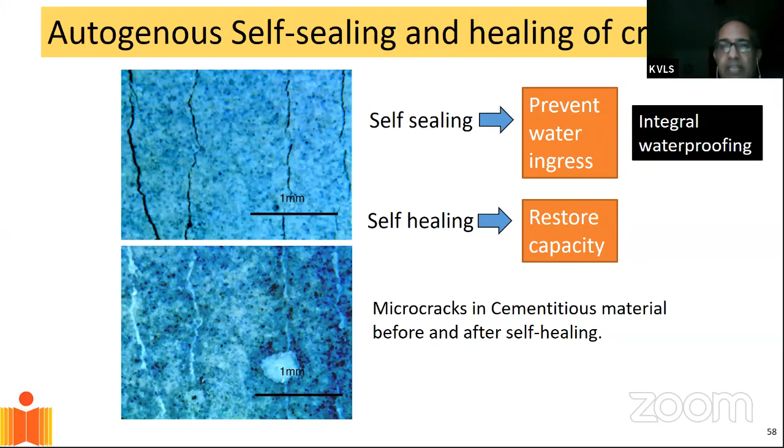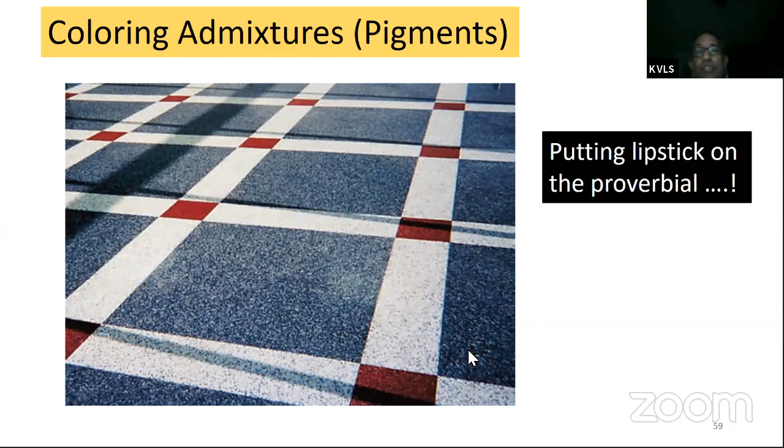Then we're talking about coloring admixtures. We're talking about concrete which, rather than paint from outside, uses pigmentation to give it color. And this is long-lasting color because this is concrete that has been produced with this color on the inside.

Now we are entering into the domain of nanotechnology. So how do I now produce self-healing, self-sealing, self-scrubbing, self-cleaning concrete? We're talking about the use of nanotechnology for improvements in strength, self-sterilization.

Self-sterilization has become very important, particularly in the COVID scenario, where can I produce surfaces which are self-sterilizing so that I don't risk some infection or these germs, microbes getting transmitted through the surface. Durability and internal self-repair—so use nanotechnology for this purpose.

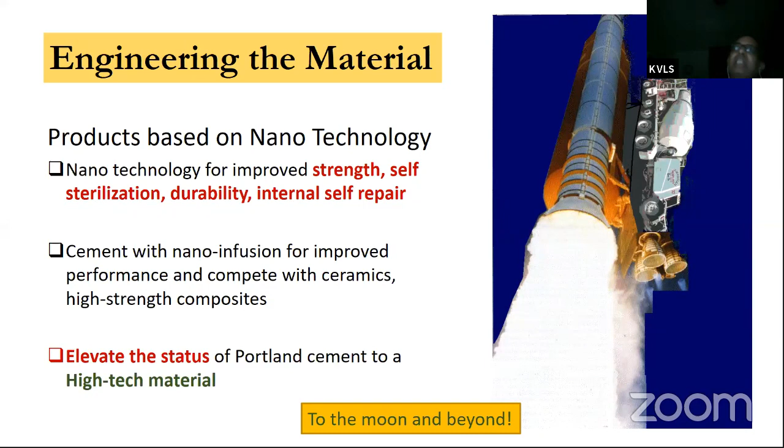So cement with nano infusion is being thought of for improved performance. We're looking at cement so that we can produce this material and start competing with ceramics and high strength composites. It's not just limited to use in concrete—essentially elevating the status of Portland cement to a high-tech material. That's what we, the material scientists working in cement and concrete, are currently working on.

To give you an example, cement which is infused with titanium dioxide nano crystals has already become a reality. Titanium dioxide is a photocatalyst. If it is exposed to atmosphere or sunlight, it has the ability to scrub or basically clean the environment of harmful NOx gases.

So what is done is that cement contains these nano titanium dioxide crystals, and when the cement surface is exposed to sunlight, it basically cleans the air which is immediately in contact with the cement surface. So the cement surface becomes self-scrubbing, self-cleaning, and it also has this sterilization effect.

So this is now actively being looked at because, being self-cleaning, it does not accumulate dust, it does not need painting, and it looks fresh in the long term. So this is the other advancement in technology, using nanotechnology for producing commercially viable products.

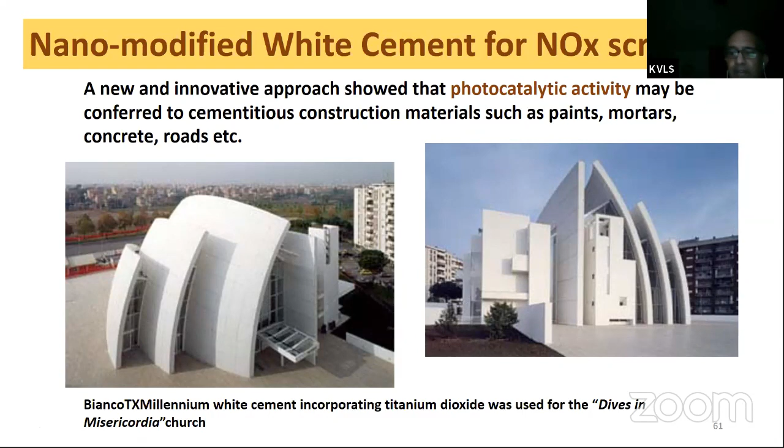The last thing I want to leave you with is this topic of active control of concrete. While we're talking about the performance of concrete structures and fresh flow, can I do something where I can engineer the flow, set it on demand? Can I throw open a switch and let the concrete start hardening when I throw the set? So I have concrete which is fluid while I'm transporting it, while I'm pumping it.

Once it's inside the formwork, I basically simply open a switch and it goes into a set behavior. Now here we are working on the use of magnetorheological fluids.

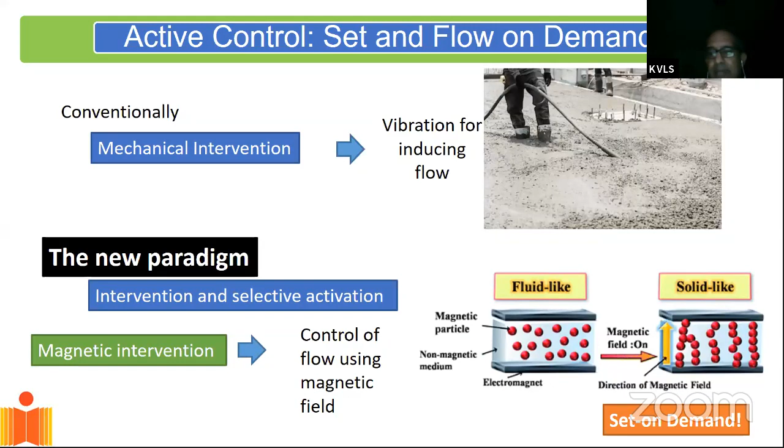That is the concept of set on demand. A lot of active work is going on in set on demand using electric and magnetic impulses. So that is basically all the different performance-related improvements being sought and developed for concrete, including its fresh and in-service behavior.

What are the challenges that we face? Cost is the primary challenge. Now that we're bringing in complex chemicals into the picture, it does increase the cost.

Black box. A lot of these chemicals being produced for achieving specific improvements in performance are being developed by chemists, and they are black boxes. They're very complex chemicals, and because it involves chemistry and we are civil engineers, we find it very difficult to understand this. But this also means it opens an avenue. Now, as civil engineers, we have to invest the time and energy to learn the chemistry, to be able to engineer it to deliver the performance we are looking for.

Drug interaction. This is something we notice when we take multiple drugs—they can interact with each other and produce harmful effects. When I'm using multiple admixtures, they can interact and produce undesirable effects. So we need to understand how these different admixtures interact with each other.

Government is another issue. Government policy has not kept up to speed with the development of technology. As a result, the use of this new technology in the government sector is lagging, and that creates a problem because the government is the largest stakeholder in infrastructure, the largest owner of infrastructure in this country. So unless the government steps forward and starts encouraging adoption of this technology in a fast manner, it's not going to be adopted.

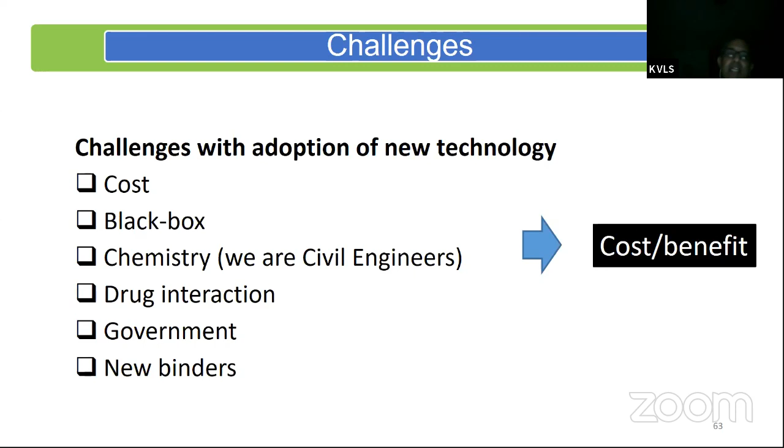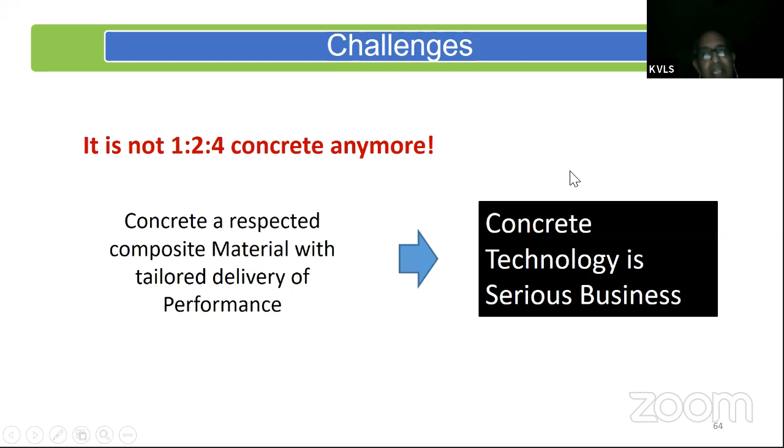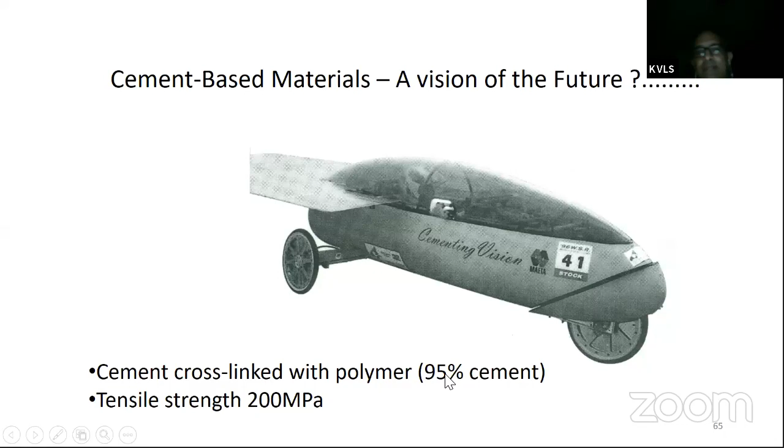So this is likely the vision of the future for cement, where we look at cement and concrete as an engineered material. We can start producing cement components just like we do any other component made of steel, aluminum, or ceramics. So with that, I'd like to thank you for your attention and take any questions that are there.

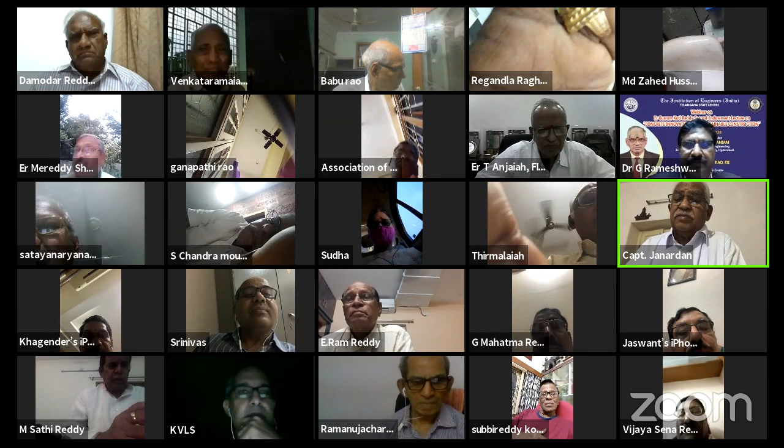Good evening everybody. We just now heard the endowment lecture in memory of Sri Gurram Koti Reddy garu. I think it is appropriate time to remember his greatness and his great deeds in the irrigation department. I am fortunate enough to have worked as Deputy Executive Engineer when he was SE Hyderabad Circle.

He was the real taskmaster. He was responsible for supplying drinking water to Warangal city in record time. Before he took over, importance in work was given to economy in execution of work, irrespective of time consumed. The result was that contractors used to quote less rates and get the work, and then try to get the estimates boosted up by illegal ways. And when that was not possible, they used to abandon the work. So getting the balance work done through other agencies at higher rates, penalizing the first contractor, was never an easy job. Finally, it resulted in abnormal delay in completion. So Mr. Koti Reddy changed this practice.

He first got the estimates prepared at workable rates and told the tenderers to be careful while quoting. He told them clearly that all the contractors would be engaged on different reaches, so there was no unnecessary competition between them. Thus, having good rates, they could deliver the work in time. Thereby, he could supply drinking water from Lower Manair division to Warangal city, nearly 90 kilometers. But one thing, he gave it in record time, because the time was fixed that by 1983, by Ugadi, the work should be completed and water should be given, and he gave it in time.